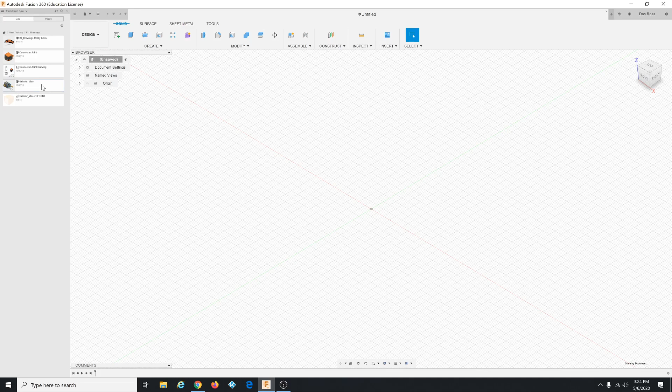I'll move this off to the side. Fusion's up, go to the data panel. Under basic training, under section 8, you'll find this grinder vise. Open that up. There it is. You don't really need to save this because we're not going to be making any updates to the base design.

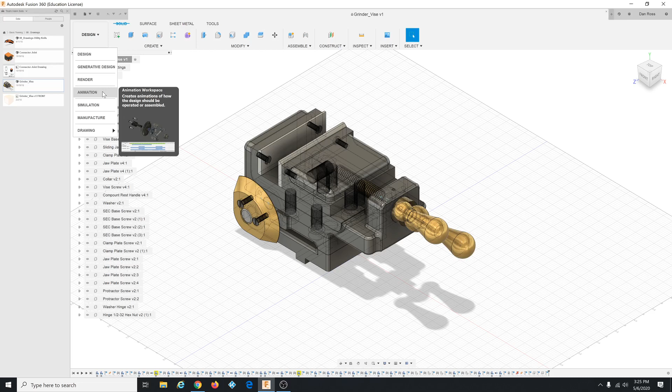One thing to look at is if you go to this design drop down and change it to the animation workspace, click animation, there's an animation they've already done for you where they've set up this exploded view. You could do that animation tutorial if you want to see how it works, but it doesn't look very hard - there's a button you click and it does auto explode.

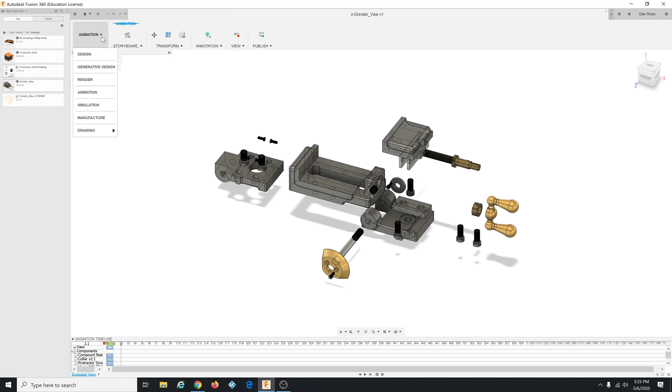I'm going to go back to the design space. That's all - the only reason we need to look at that is really to see that animation.

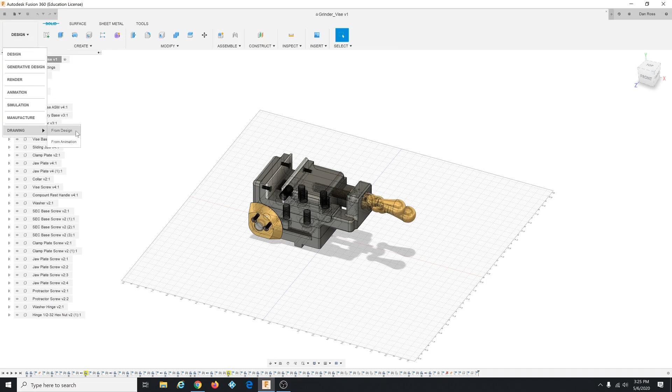Then we're going to make a new drawing. Click the design button and go down to change to the drawing workspace. You want drawing from design. We want ASME inches, we want to go C paper size, and make sure you have full assembly clicked. Click OK.

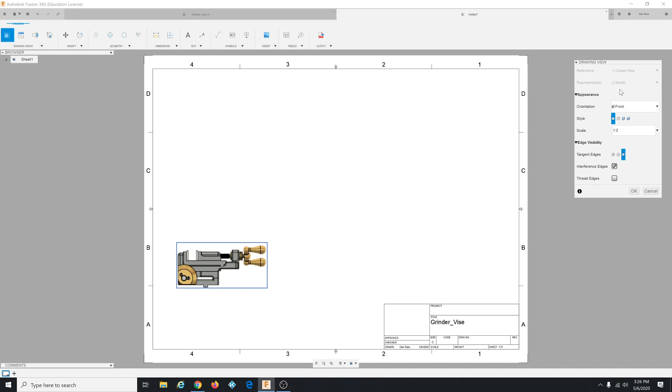Throws this down, so our base view will drop right there. Then click, let's see, we want interference edges, and you might have to make some changes, because I've done this tutorial already and it pulls up the defaults from the last time I did it, but check with the tutorial to make sure you're doing the right stuff.

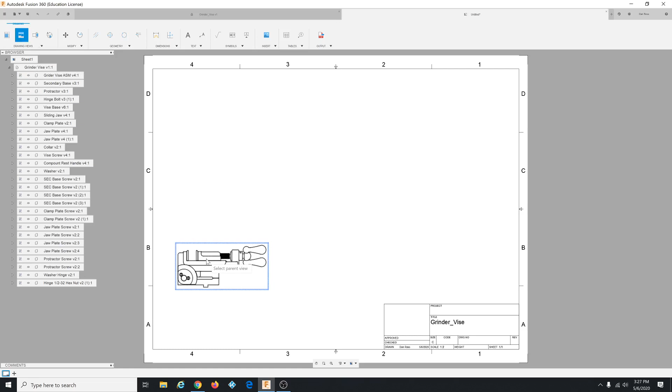It matures into this line drawing here. Now we want to add some projected views, so you click the projected view button. You need to select the parent, and then from that it'll let you place these other views. I'll place one there and one there, then press enter to complete that, and they mature into line drawings.

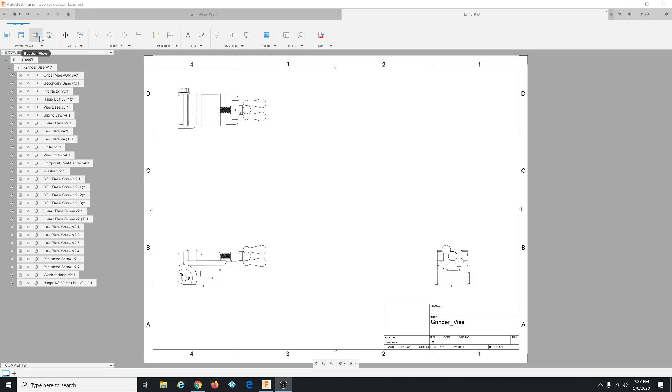Next we can add a sectional view, there's a button for that. You need to select the parent view, which is this one. Then you need to draw a line through the middle of this, which is a little bit tricky - it looks like you can just click a spot kind of anywhere. There's a midpoint snap happening there. I'm still trying to figure out how these snaps work on this thing.

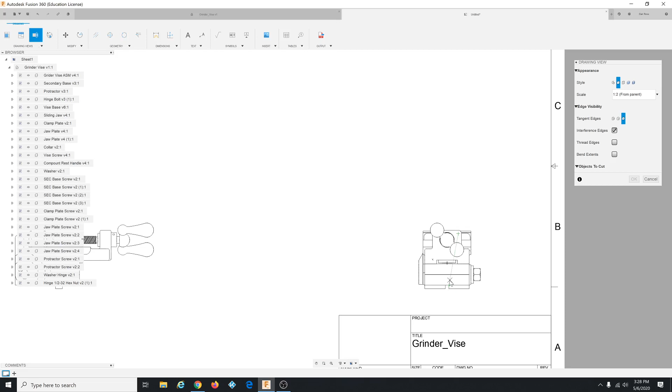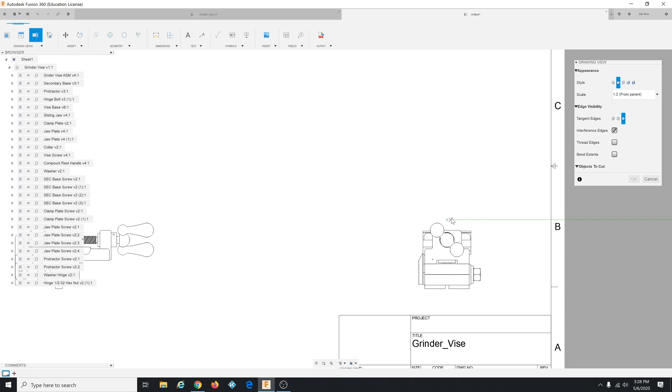Let's see, there's midpoint, then midpoint. It's a little bit weird. I think that's what I want right there. You want it to go through the middle, but I don't really understand how these automatic snap modes work. Anyway, get it to look like that, and then I just want enter now. You might have to play with that a little bit to get the arrows to go the right way, maybe do it a couple of times. I'm just going to drop that down there and click OK.

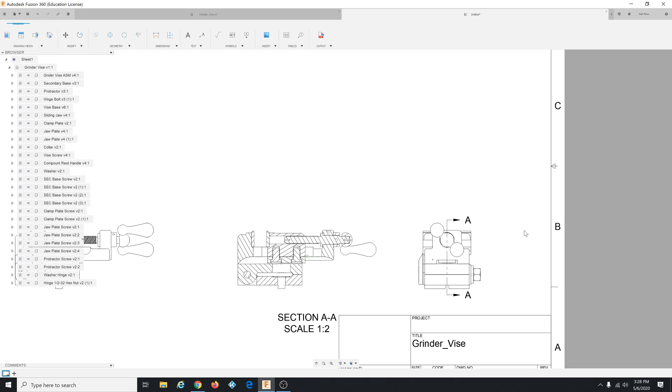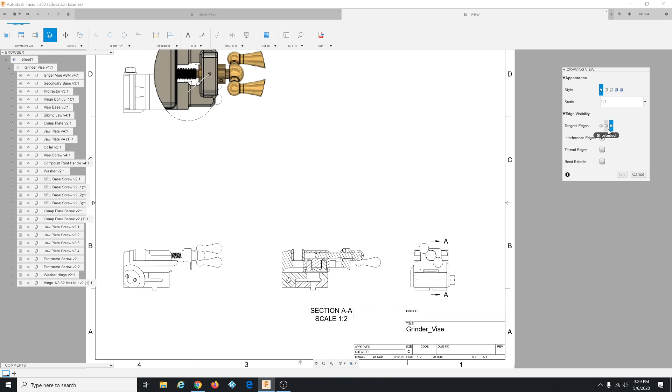Then time for a detailed view. You click the parent, we draw a circle basically, and in the drawing view dialog here, for style they want you to have from parent. Although you could change it to these other styles, but the point is later we're going to change the parent's line style, so we'll pick style from parent and drop the detail view right there.

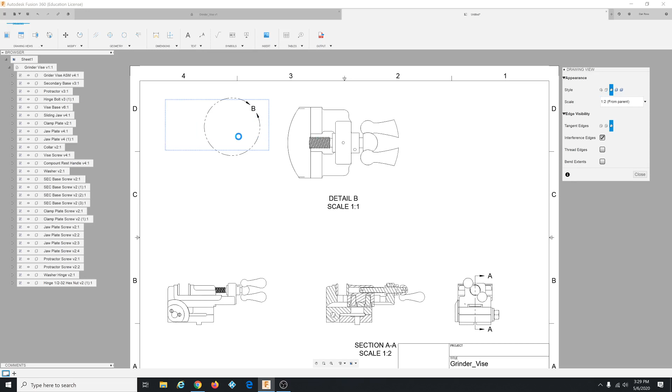Click OK, it throws that down there. But when you go back to the parent and double click it to edit, you can change the line style to, for example, visible and hidden, and it changes the parent you just selected as well as any views based off of that, which is this detail view. So it adds hidden lines to the detail view as well as the parent.

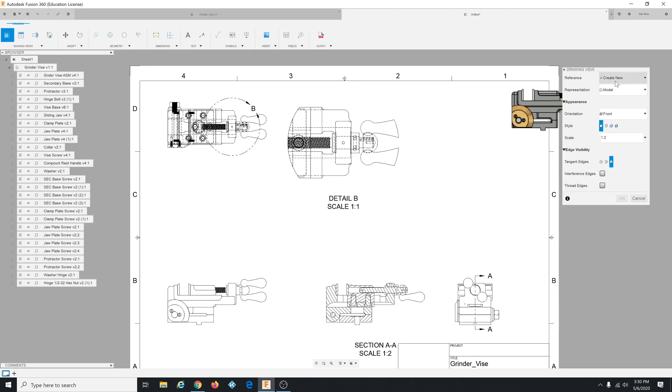The last thing is an exploded view, which is super cool. That's considered a type of base view, so you start off by doing base view, but on the representation field in the dialog here, change it to exploded view, and in scale, change it to 1 to 3.

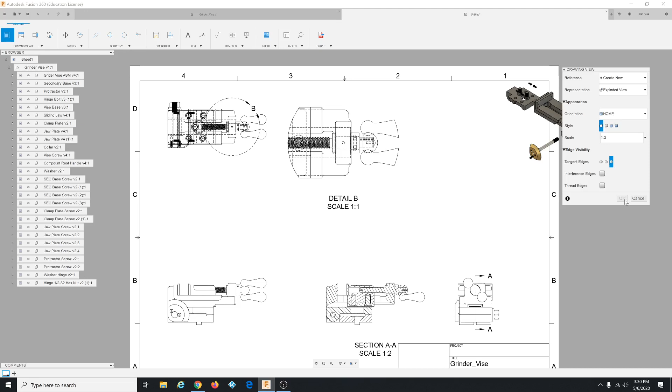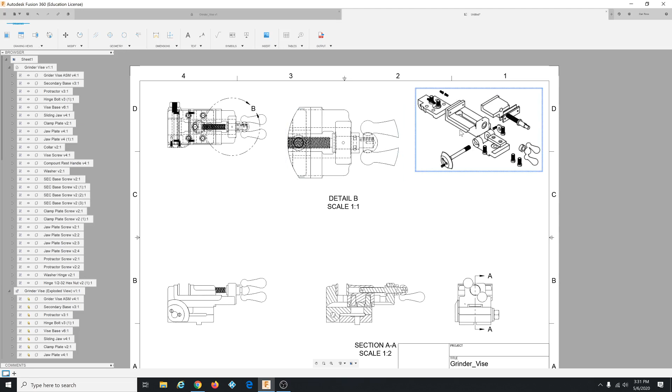And that's it. They want you to use shaded with lines - I don't like that, I'm going to just do visible. And drop that thing there, click OK. Throws that down there. Exploded view, it's way cool. And this exploded view comes from the animation in the original design. You know, that's the tutorial.

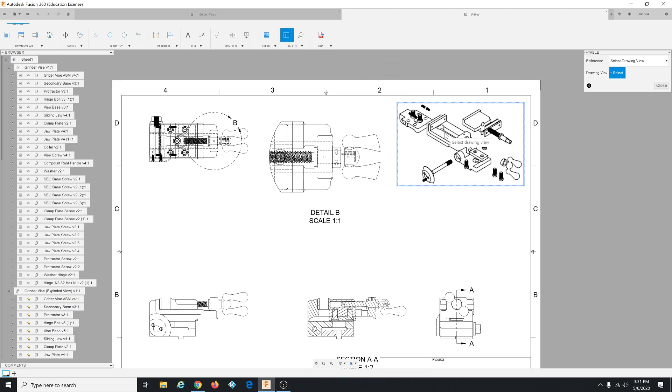I'm going to do one more thing though, because I just want to see if it works. I want to see if I can add a parts list on this exploded view. So I'm going to go up here to tables, click table. I'm going to click this exploded view as the drawing - is that drawing view? Yeah, exploded view. And then I'm going to drop.

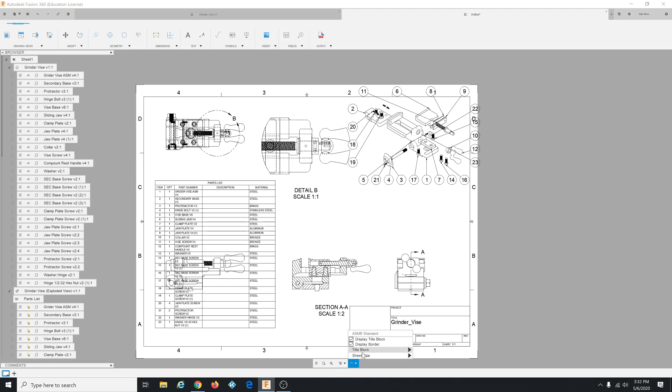I don't have anywhere to put it. I'm just going to put it right here. Oh, cool, that is neat. I like that. I guess I'd have to use a bigger piece of paper, and I don't know how to change that now - oh, sheet size. Let's try D. Oh, I like it.

Oh, sweet. Yeah, this is cool. All right, that's it. Hope that was useful for you. See you next time.